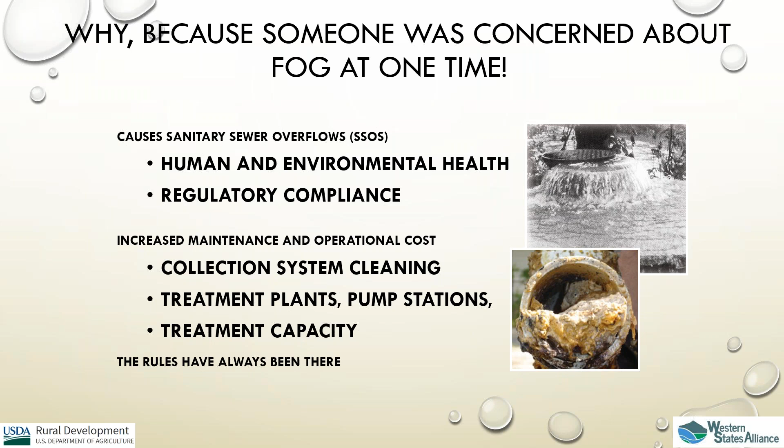There's another reason: you may have an increase in maintenance and operational costs in the collection system, or grease buildup at the treatment plant, or even at the pump stations, as we talked about last week. The other one that sometimes creeps in is capacity. Is capacity an issue at your facility? And if capacity is an issue, what can you do to reduce the inflow of the extra solids and extra BOD and TSS that comes to the plant? Sometimes addressing FOG helps reduce capacity issues.

But the important thing to think about is, obviously now that you know you have a program, or you're thinking about improving one, or if you haven't had a program and after watching our first two webinars you decided to go ahead and start one. But the most probable reason that you do have a FOG program is management. Management says that there's a need out there, and they also told you that was the case. And the fact that you're now improving the FOG program is definitely in your future.

You need to know more about the desired outcomes. What are the desired outcomes that you want in improving or expanding your current FOG program? Something we've said before, and I'll read it again: we want a data-driven FOG program, not an effort-driven program. That really hits home, and it's important to know it's a data-driven program, not an effort-driven program. By the way, that was Gary Christensen of the City of Seattle public works.

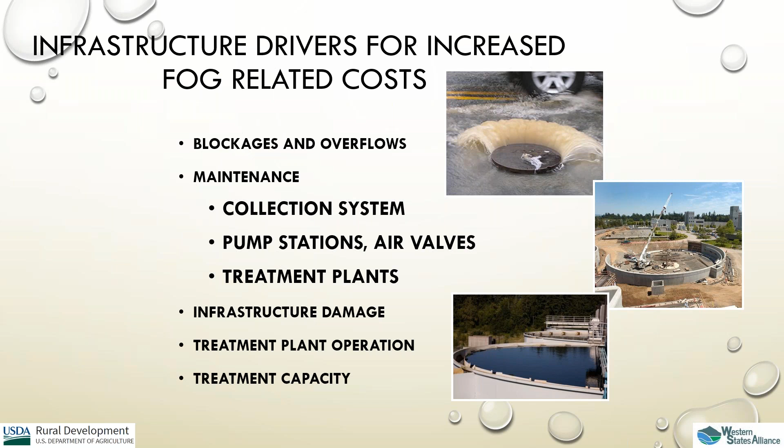Once again, here we are again. We have regulators as a driver. They definitely are a driver for a FOG program.

Like I said earlier in this presentation, if regulation is the driver for your FOG program, there's a lot of aspects of your program that's going to come under scrutiny. And if your POTW permit is up for renewal, I guarantee you new conditions are going to be applied. Not only additional reporting, but record keeping for the SSOs.

Also, you may actually require additional public notifications when you have an SSO. And once again, I think this is something that a lot of people don't end up doing or taking advantage of.

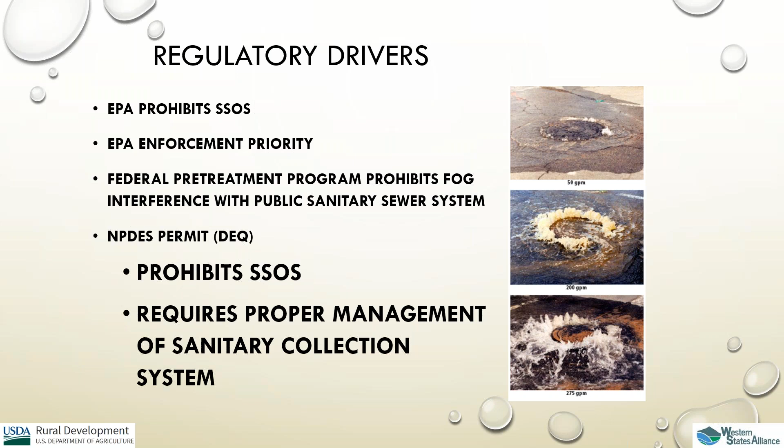This is document the management and operational and or maintenance programs and make sure that they're up to par. It's not just the collection system, but it's also the management's operation and the maintenance programs. Make sure they're up to par. And if they're not, highlight what needs to be improved and work on those improvements.

Well, what are the outcomes and outputs for that regulatory driver? If the activities I've talked about in the previous slides have already come about, or that's already happened to you, I guarantee you that regulatory agency is probably addressing those issues right now.

But here's the other: if you're afraid or concerned about the regulatory agency, once again, the answer is very simple, but it's also kind of more complicated too. The simple part is just comply with state and federal regulations. Don't have those SSOs related to FOG.

No illicit discharges to the storm system. Excuse me, illicit discharge of FOG to the storm system.

And once again, this is probably the more difficult one, but to reduce or have no restrictions in the collection system that have to do with solid or those viscous substances. And once again, no infrastructure deterioration or damage due to the FOG. And once again, if you're having it, make sure you document it.

Now here's that, that was the easy part, is no, no, no, no, no. But the hard part now is your FOG program. And if you need to expand it or fine tune it, it's time to start now. Or if you don't have one, it's time to implement that FOG program.

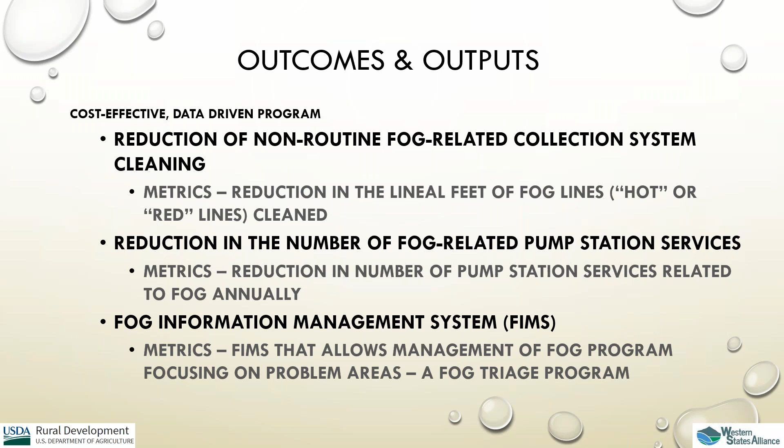That particular last slide was a good segue into this one. What are the programmatic drivers? What always seems to be discussed every time you have a staff meeting, but particularly around budget time, is program cost, budget, or is it in the budget? Those issues always come up.

And what they're concerned about is the program cost for inspections. Is it in the budget for a data management system? And is it also, what is the budget program cost for program oversight? That's inspections, data management, and oversight. What are the program costs for these items?

But these are three very basic items, but they can be very expensive and budget busters. Once again, back to that data-driven program, not an effort-driven program. This is where it really can cause a budget buster.

But your FOG program can be a very cost-effective program, and the key to making it cost-effective is having good planning, triage, proper data management, and management buy-off at the highest levels. Let me repeat: good planning, triage, proper data management, and management buy-off at the highest level. All those are very crucial in having a cost-effective program.

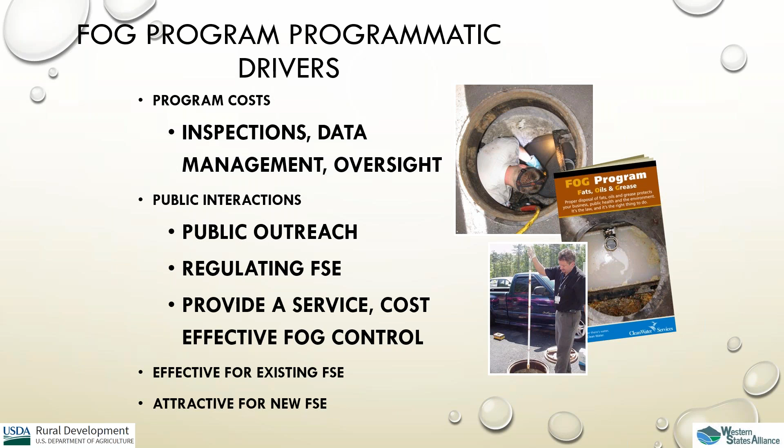Once again, when people ask you questions and get answers, they may or may not like them, but they feel like they're being paid attention to and listened to.

I'm just going to go through the slide here to summarize everything we've talked about. The important thing is to comply with state and federal regulations, and that's the easy part. But if you have no fog-related SSOs, no illicit discharges to the storm system, no restrictions in your collection system from viscous substances, and no infrastructure deterioration, you're in a darn good place. You have a pretty successful program, and if you have all these items, you've got one good program.

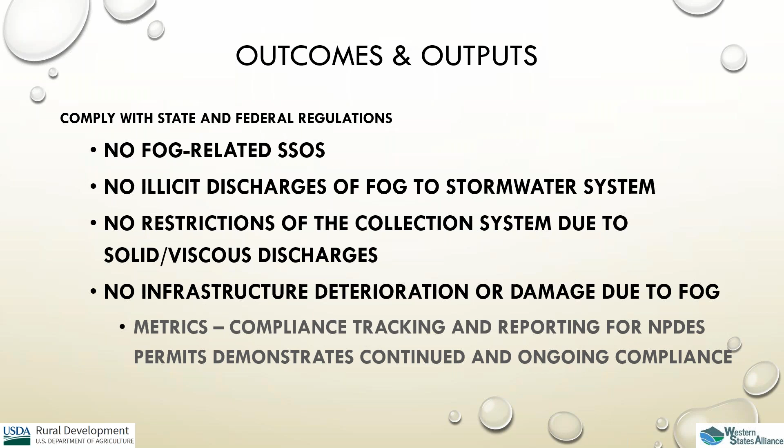Does your city or utility have a formal fog program?

Okay, I'm going to close it soon. Few more seconds. Okay. Oh, wow, that's a big number. Yeah, we're glad you're on this presentation. I think that's probably one of the higher numbers we've seen.

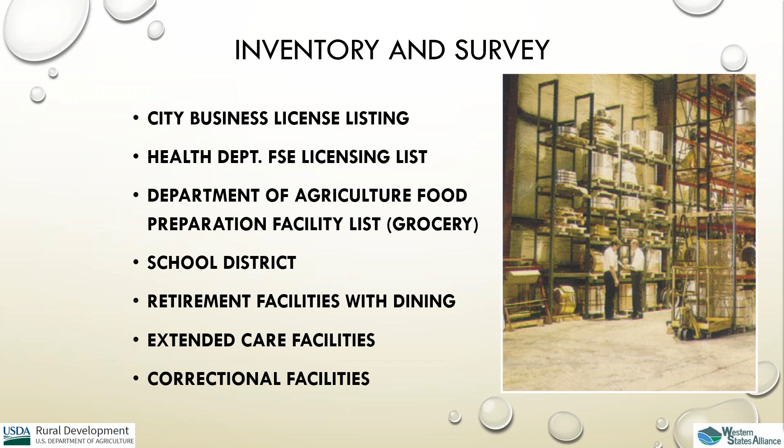Let's talk about stakeholders. We talked about this in the presentation last week, how important it is when you're doing your FOG program development and planning. It's important too when you do your implementation—you need to make sure you've kept your food service establishments up to date on what you're doing and how you're going to implement your program.

If you already have a FOG program in place, you need to make sure your food service establishments are aware of the criteria you've established and what their responsibilities are. Small businesses need to know what the regulatory structure is and what the requirements are.

In a lot of communities, a small business can come into the community and set up a restaurant, and if the city hasn't given them the criteria they need to meet to stay in compliance, they'll do their best, but they don't know what they need to do. Over and over, we've heard folks say, if you just tell me what to do, I'll do it, but I need to know, and I want it to be the same for me as it is for Joe down the street. So keep that in mind.

Your building and plumbing officials, your plan reviewers, they need to know what the expectations are when they do a plan review on a new food service establishment. They need to have information they can give back to the owner of the restaurant. Ed's going to talk about this in more detail, but a lot of building codes set a minimum bar, a really low bar.

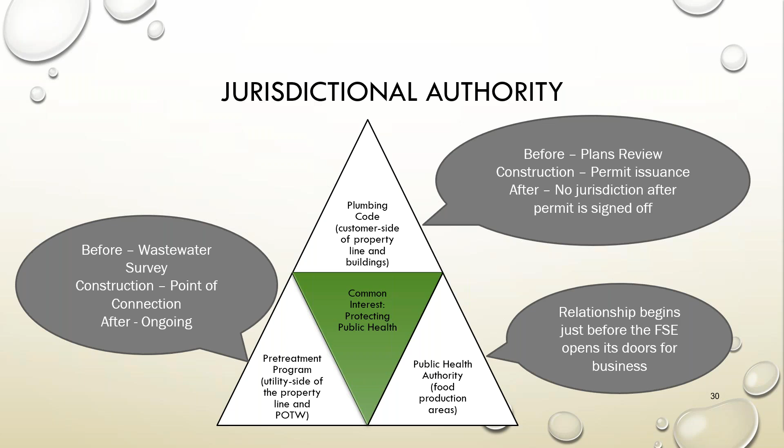Again, a list of your potential stakeholders and partners. These are the folks you're going to partner with when working your FOG program: city officials, food service establishments, the pumpers - we talked about them and will talk more on Wednesday - other regulators, which we went through today, property owners and property management, consultants and contractors, school districts, hospitals, and long-term care facilities.

We had an issue in Washington County where we had a major trunk line that went through a wetland area, and on the hill above - it seems like they always build hospitals up on hills, I don't know how that is - this is another hilly hospital story, not one that I told Ed or that Ed tells.

The hospital did a remodel on their kitchen. We were not aware of it. The city building official was not aware of issues with protecting the fixtures and drains, because it was right before the plumbing code changed. So the hospital put in a brand new kitchen. They'd just expanded their facility, adding a couple hundred beds to one of the hospital wings.

So the number of meals they were going to produce was larger. They expanded their cafeteria and added a cafe and a coffee shop. About four months later, we had a sanitary sewer overflow in the wetland area downstream from the hospital.

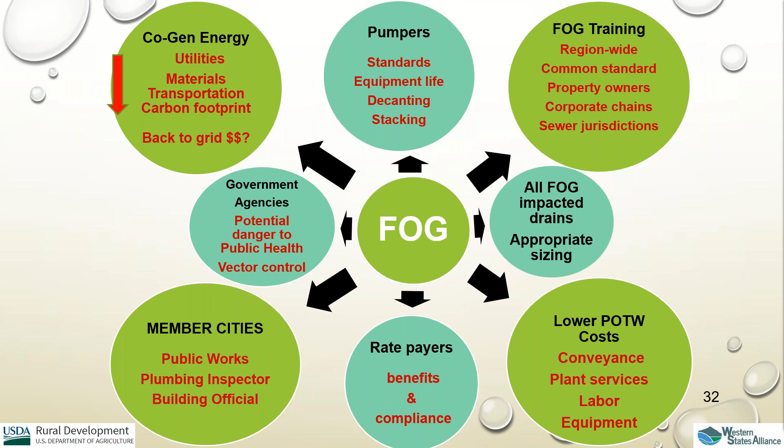I also talked about making sure that your restaurants, your commercial facilities, know what they need to do and the consequences of not doing it. You need to make sure that they know what your fog requirements are, that they need to have some kind of an interceptor, that they need to maintain that interceptor with regularly scheduled pump outs. They need to keep records of the pump outs and potentially submit those to you, and that there's potential for enforcement action if they fail to comply with your code, or if they cause a sanitary sewer overflow or a backup or excess line maintenance.

They need to know that, because most of them, if they know what they need to do, they're going to try and do it. You may need to provide technical assistance, but keep those folks in mind and make sure that you provide that information to them either through a letter, or when they come into your jurisdiction, you give them a packet of information that has this stuff in it, or flyers, technical assistance - give them some information on doing fog loading calculations so that they can appropriately size their interceptor based on what kind of maintenance schedule they want it to be on.

Ken's going to talk about that more later. We have some of those fog calculators linked on our website. Almost all of these fog calculators use the Kennedy-Jenks study for grease loading, so they're pretty accurate. Although Ed's going to show you some pictures of some designs that were installed and didn't quite get up to the expectations on Wednesday.

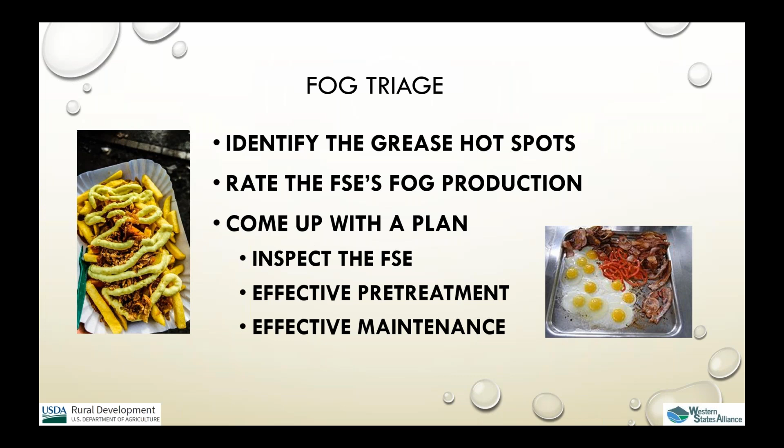And the last of the three steps here for fog triage is to come up with a plan to inspect the food service establishment, talk about effective pretreatment and effective maintenance. You can be working on that plan while you're doing steps one and two, but you'll need to be prepared to discuss what kind of pretreatment might be most effective for that facility and what effective maintenance for that pretreatment would look like. We talked about tracking and particularly GIS mapping to do that - this is another look at what Ed talked to us about earlier.

This is a Clean Water Services map of their service area. The red dots are quarterly cleaning, the yellow are semi-annual, the green are annual - all of them a far cry from the standard 3 to 5 year cleaning cycle that is common for most sewer pipes. When they mapped out all of the FSEs in their food service area and overlaid that map on the grease hot spots, you can see there's a very direct correlation between clusters of areas requiring extra cleaning and clusters of food service establishments.

So that was one way to both collect and keep the information and track things. It was also a good way to present the information to various stakeholders in a very clear and concise fashion as to why the fog program needs to be implemented and what the anticipated results could be.

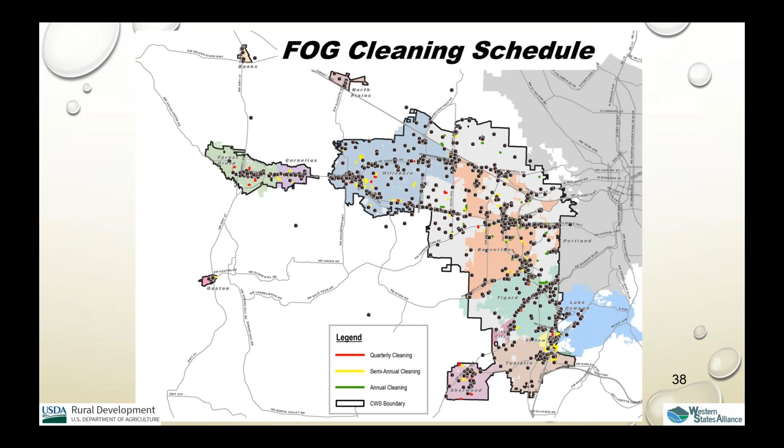In this particular one, you could put in any address, and that map would take you right to that location. It took a lot of time to put that all together, but now they have a very efficient system for tracking whenever they go and make a service call.

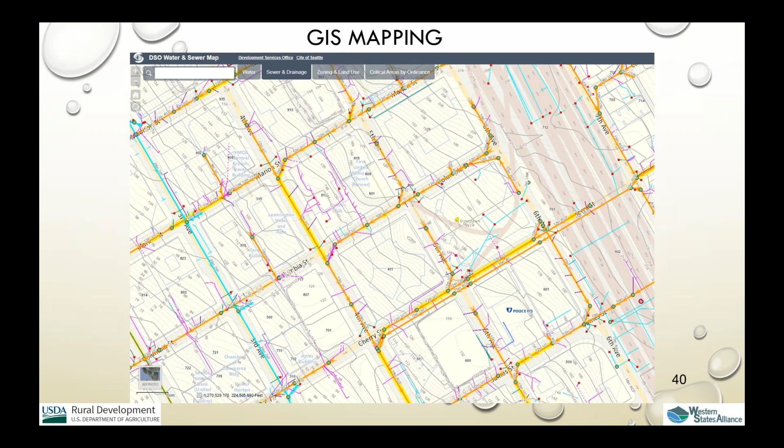So we talked about fog production, about rating facilities as very high, high, medium, and low. And we also talked about the Kennedy-Jenks brown grease study, which is most commonly used as the basis for that categorization.

A lot of restaurants, when they went in and took a look at them with this study, went in with an idea of exactly what they expected that facility to be - whether they thought it would be high, very high, et cetera. They actually have those all listed out as an appendix in the study, Appendix C. If you look here, the full page is page 1 of the facility.

The table is 20 pages long altogether, and there are hundreds and hundreds of restaurants that were part of this study. This includes the initial listing category and a post-study category, which you can see in the magnified snippet, covering that page and most of the right-hand side.

As you look at it, you can see that a lot of the American restaurants, for example, were anticipated as high fog producers, but when they actually got out and started measuring them, the vast majority were not. There were 45 that were tested, but test results showed that 35 of them came into the medium category - that's about 80% of the restaurants. So the overall designation for that category would come out as medium.

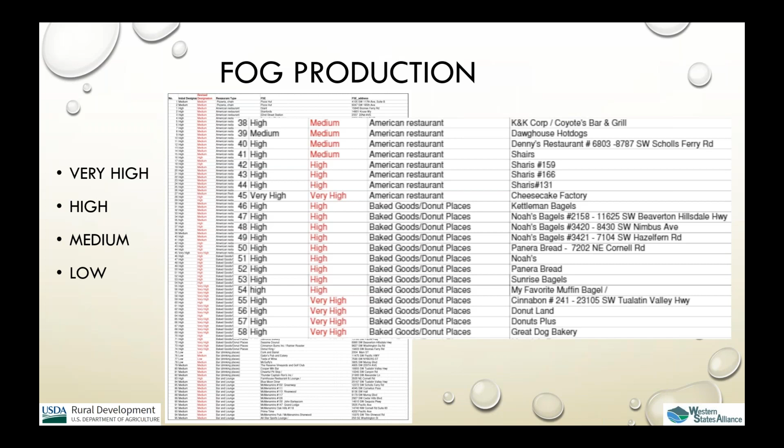So once you've done those things, now you're ready to do the inspection on the food service establishment and do your walkthrough in the facility.

Early on, you'll want to identify where the grease removal device is. If by chance they don't have a grease removal device, then the plan is going to be a little bit different, and we're not going to cover that at the moment in the interest of time.

But once you've determined the location, you can visibly inspect the interceptor, determine what kind of condition it's in, find out which fixtures are or are not connected, and how often it is serviced.

That's part of the information you'll need when you look at the rating capacity of the interceptor and the grease production of the facility, using that to establish an effective pump out schedule.

And again, as with the example we gave earlier, you'll want to do that with the restaurant manager if possible.

You'll want to do that using the calculators we'll look at Wednesday, and that will establish your pump out schedule. You'll be able to do that either based on how often they want to pump it out, which will determine what size interceptor you want, or how often it has to be pumped out based on the grease production they have.

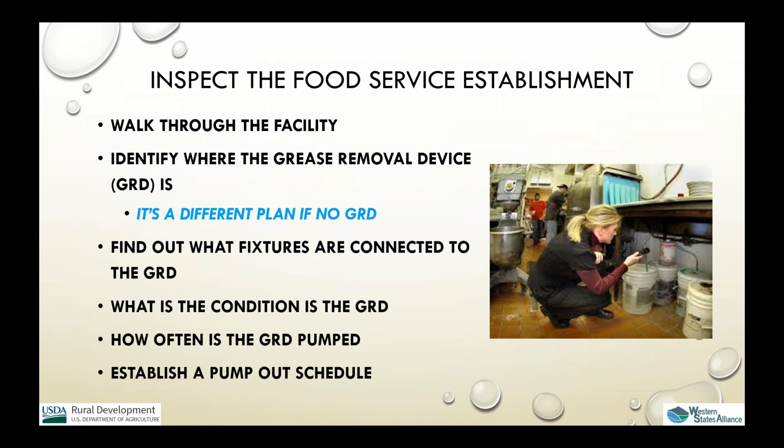So we're going to talk a little bit next about best management practices in the kitchen. But before we do, we have another one of Krista's polls. All righty.

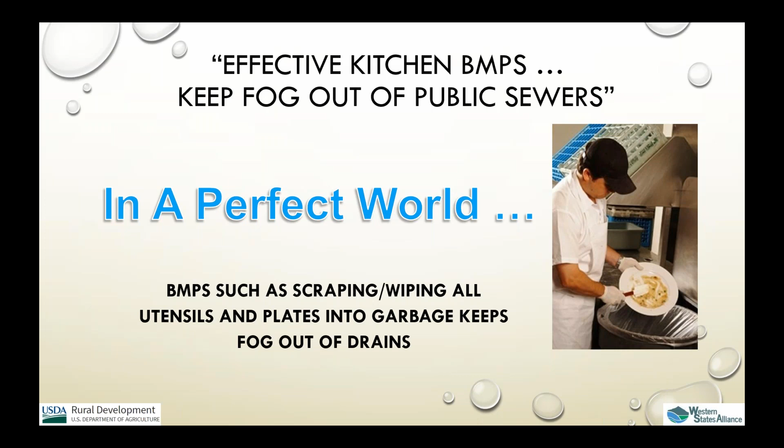Unfortunately, there is quite a difference between the perfect world and the real world. In the real world, cleanup staff are always in a big hurry. I've never seen a kitchen where the dishwasher wasn't working at a fairly consistent, if not furious, pace.

They're doing everything they can to get cookware and tableware cleaned up and returned to service as fast as possible, and they're doing it over and over again throughout the service day as people come and go. So at the end of the day, cleanup is usually performed by fairly tired staff, given a minimal amount of time to do the job.

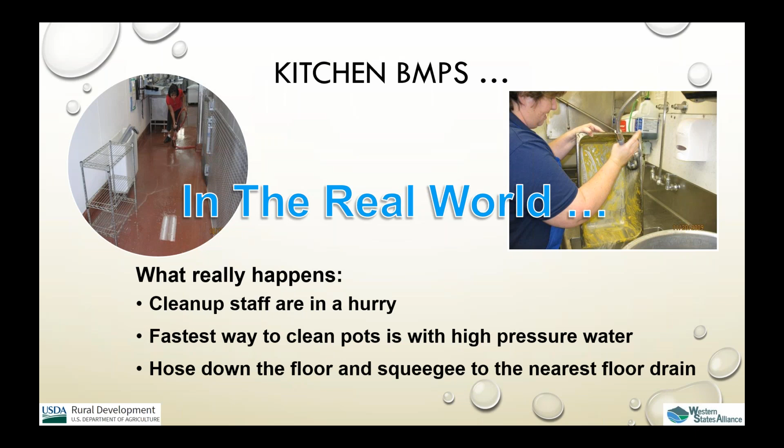The food service manager's responsibility is chiefly about getting good food onto the customer's table. That's the whole purpose of the restaurant being there. So overseeing daily operations, hiring and training staff, coordinating schedules, planning menus, ordering supplies, dealing with unhappy customers and resolving their complaints are all things in their daily life that come before kitchen best management practices for the FSE manager.

They also have budget constraints to operate within, reports to submit, revenue goals to meet, regulatory compliance to worry about, particularly with the health department if there are inspections coming up. So for these and other reasons, staff best management practice training is frequently delegated to a more tenured employee in the same area, i.e. the dishwasher that's been there the longest is training the new people on what best management practices are.

And that may or may not be effective, and there may or may not be follow-up on the training by either the restaurant manager or that more tenured employee.

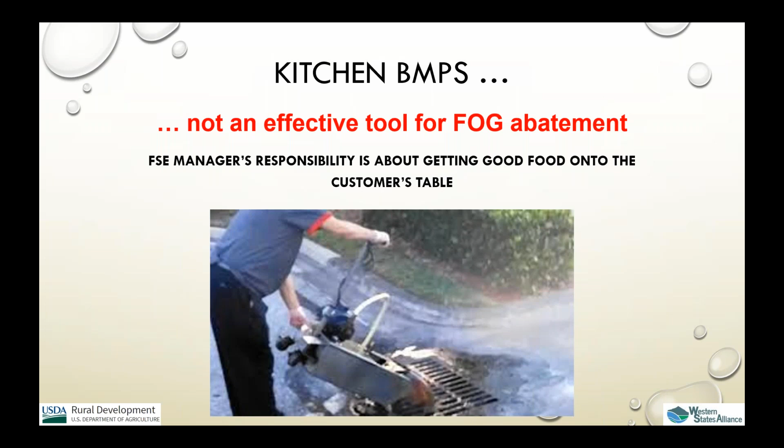In a lot of cases, it's more like 100%. Some FSEs have reported 200% or higher turnover rate, which means they have to train a new employee at least 2 or 3 times a year in kitchen best management practices understanding.

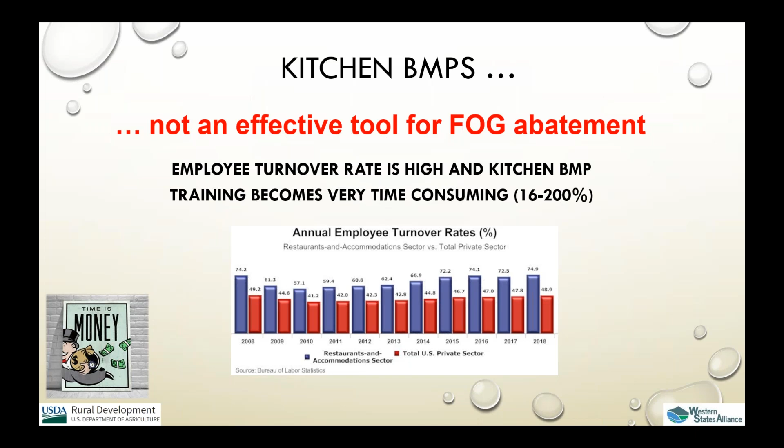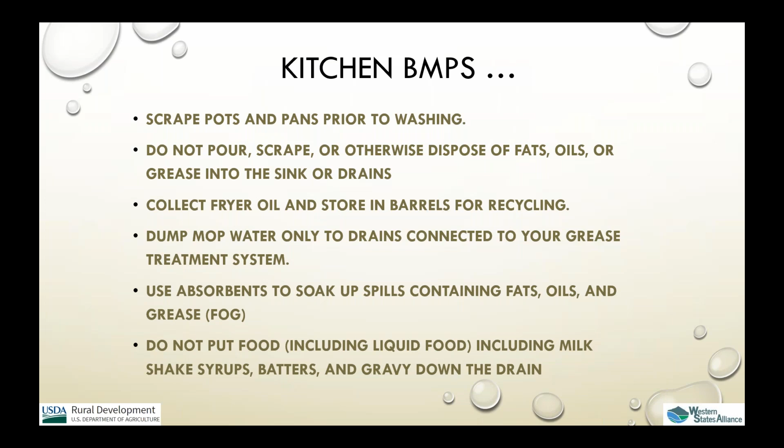Also with kitchen best management practices, there's a wide variety out there, and you're not going to be able to train everybody on everything. You're not going to be able to list them all out, or it'll eventually just become wallpaper and nobody will notice it anymore. This slide and the next three that follow are a collection of best management practices we're either aware of or found from a cursory internet search covering various FOG programs, restaurant associations, independent contractors, etc. A lot of them are pretty universal, like scraping pots and pans before washing, not dumping oil directly down the sink, that sort of thing. Then some, like post-no-grease signs, are fairly common.

Then there are some that are a little less universal, like ensuring that wastewater from duct cleaning gets routed through the interceptor. That's something that doesn't happen on a regular basis and as often as not gets totally overlooked. But it's important, because whenever you clean those ranges, you're moving out a lot of really heavily FOG-laden wash water.

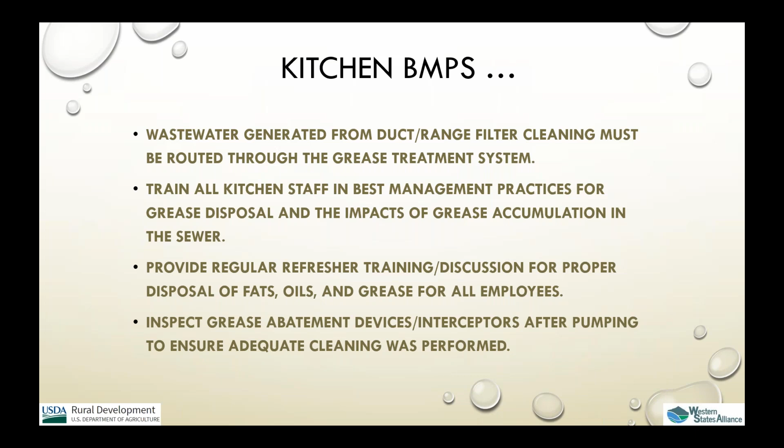There are also variations like screening all wastewater flows to prevent solids from entering the interceptor, and maintaining a written log of on-site grease interceptor cleaning and maintenance, which frequently is a regulatory compliance requirement but also frequently does not happen.

Keep in mind with all this that you're not going to be able to train new kitchen staff over and over again on all of these things. So you have to select what would be the most effective, or certainly the most effective in your estimation for your program, and then keep the list at that. The larger the list, the more likely at some time all of it or some of it will be enforced less stringently by the food service establishment.

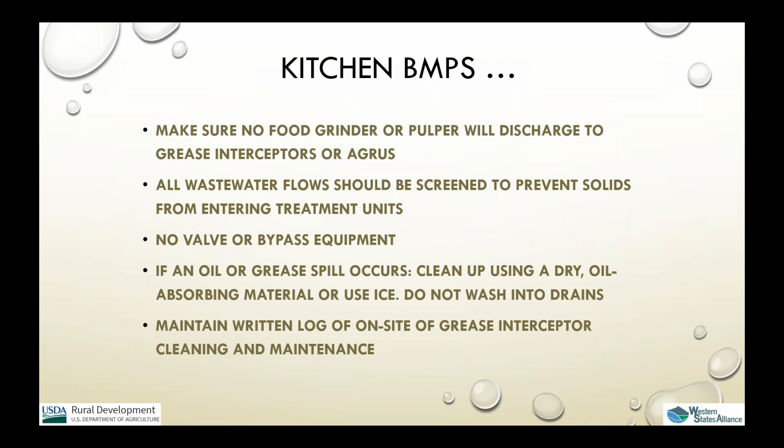You also occasionally run into the fact that sometimes the FSE does not own the interceptor or pay for the maintenance. For example, sometimes you see that in strip malls or food courts, where the costs are buried into the lease agreement, and they don't consider that their problem.

And it's particularly not their problem because it's buried into the lease agreement. They're already paying for it, so they're not getting a benefit out of addressing that. And so you have that issue to also run across.

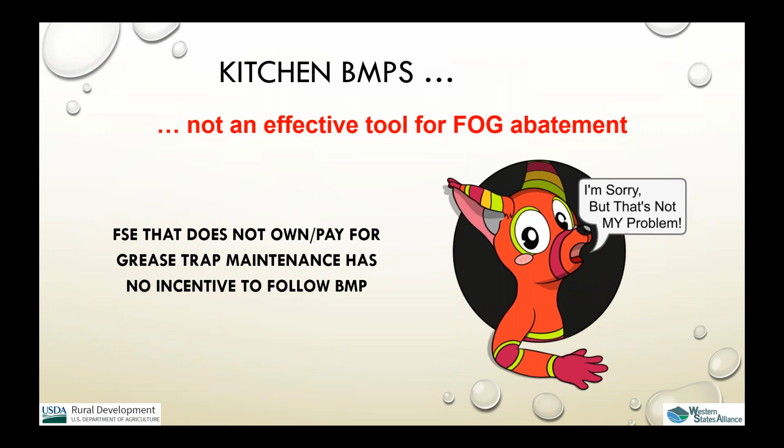So this is a look at a particular line, a high fog producing line. All of the restaurants on this line had to have kitchen best management practices implemented, and they're regularly inspected, and they have regularly scheduled interceptor maintenance.

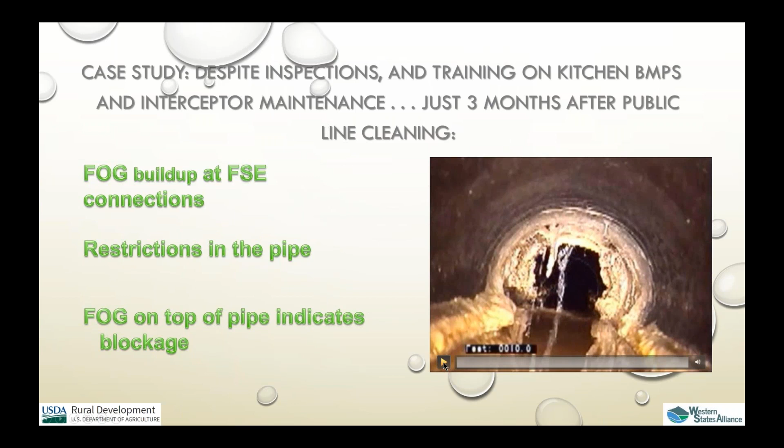So you can see on this all of the fog buildup from the discharge. This particular one is dumping in from overhead, and you're getting buildup on the wall from splatter, and you're also seeing buildup on the sides of it.

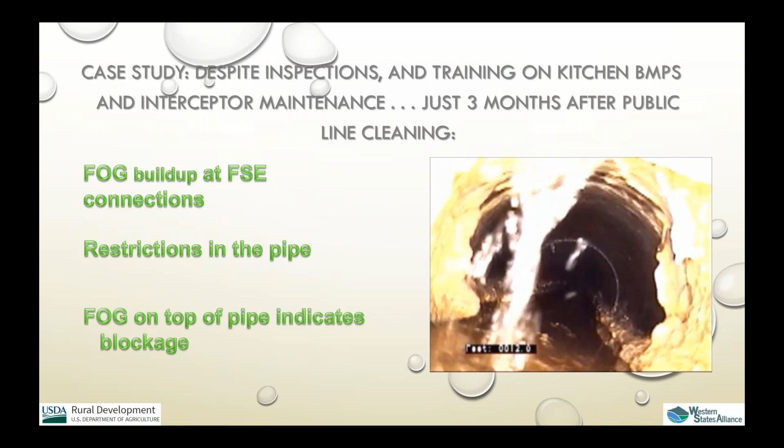And you're looking now down at a section of that sewer pipe that was replaced prior to this, the three months, that was replaced right after the public line cleaning when they found problems. So again, this is a high fog producing line, three months after best management practices were implemented. You can see their effectiveness - it may be much worse without them, but as a major tool in your toolbox, they're lacking some performance.

So what does that mean? Does that mean we need to get out of kitchen training because there's nothing good about best management practices? I hope that's not the takeaway from this, because that's not quite what we're trying to let everybody know.

One of the things about kitchen best management practices is, as we say, they are one of the tools in the toolbox, and as such, they are actually your first line of defense against fog. Your last line of defense is the interceptor. BMPs are your first line of defense, and they can make a difference. They can't make the major difference, but they can make a difference. They can help control costs a bit.

They have the most resources available to download and print, particularly resources for ESL employees. You'll see this in a variety of sources. Most major municipal areas have fog resources for FSEs. The National Restaurant Association has got a collection of best management practices, brochures and posters that you can download, print out, and post yourself. And they have a lot of them, again, in other languages.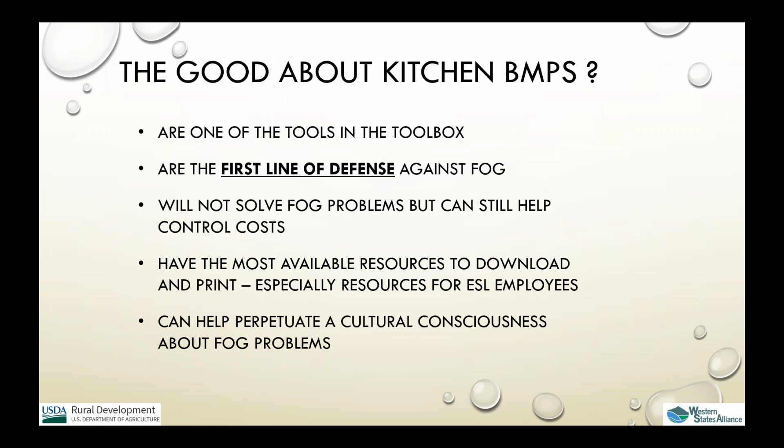So as a major part of your program, what takes the place then of best management practices? So we come back to - and I hope this hasn't become beating a dead horse for you - connecting all fixtures and drains in the food service area to an interceptor. It is just such a significant improvement.

Ed's going to expound on that a little further, and also come up again with the chart that showed the four representative samples of the testing that was done after the retrofits, which pretty clearly show that there's a significant benefit to tying in all fixtures and drains. And I think it would be hard to argue that best management practice could achieve that same thing.

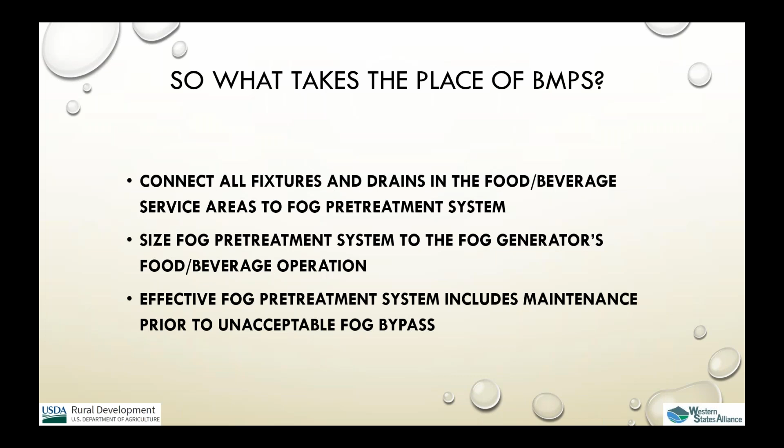So I believe it is my time to pass this over to Ed. So Ed. Here I am, and give it to me, Ken. All right, it is coming and it is yours. All right, thank you.

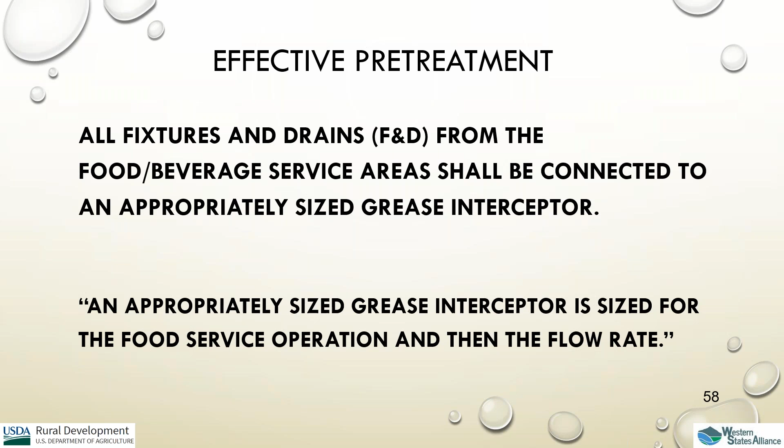Retrofits are kind of a separate discussion. Looking at the time, see how fast we are—I'm just going to go into detail on some of these slides that summarize this.

Here's a restaurant that has the HGI there, you can see it in the top left-hand corner. This is where it's just connected to the 3-compartment sink. What would happen if you moved this 3-compartment sink?

Let me tell you. If you ask plumbing inspectors, it would not be unusual for most of them to say the only thing that's important is to connect the 3-compartment sink. But we've talked about this before—the idea that the only grease that comes out of a facility is from a 3-compartment sink is wrong. We know there's a lot more grease that comes out of the facility besides the 3-compartment sink.

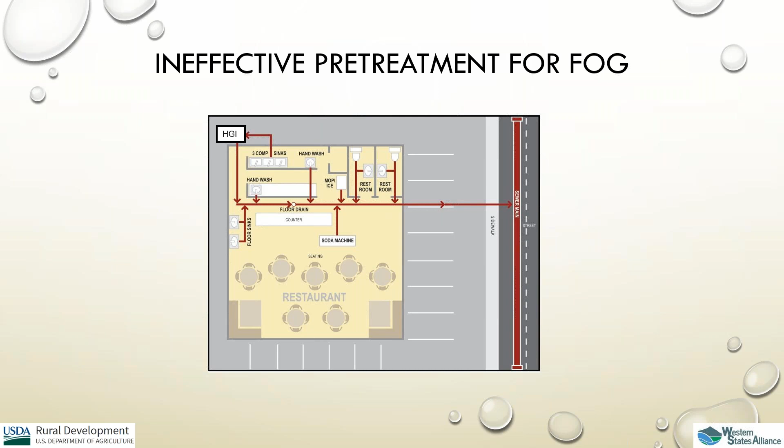But here's the next slide. I'm going to take the HGI that's up there in the top left corner and let's move it to the outside to a GGI. What's interesting is we didn't really change much plumbing on the inside. However, what we did is reroute the plumbing from the restrooms to the downstream side of the grease interceptor. Voila—all of a sudden everything in the restaurant is connected to a properly sized grease interceptor. This doesn't even have to be a gravity grease interceptor—it could be a hydromechanical one, properly designed to catch the flow from this facility.

Once again, you need to evaluate the flow with the size of the interceptor. The point I'm trying to make is that you don't have to do much to the inside of a restaurant. All you have to do is think about the positioning of the HGI or GGI—the gravity grease interceptor or hydromechanical device. Understand where it is, and you can see it isn't much more complicated than moving it to the outside. I think it captures a whole lot more grease coming out of your facility.

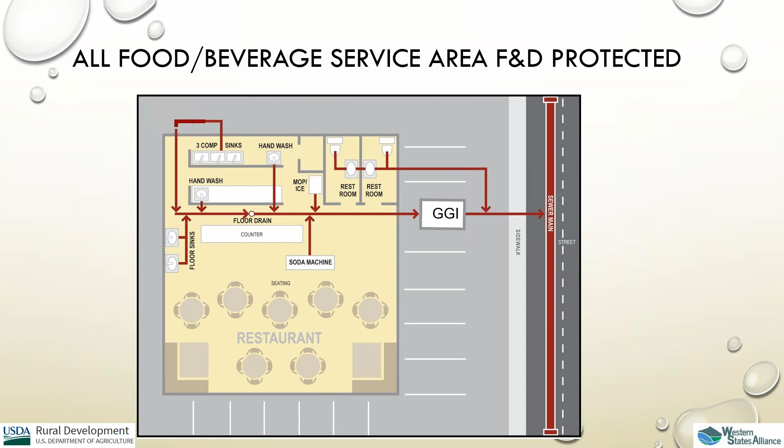This is just another—Krista, I'm surprised, do we have a polling slide here? Want to just do one of the polls? Sure, let's do it fast though. Let's just do one poll, guys. How many FSEs have most or all fixtures and drains discharging to an interceptor?

Okay. Try to take it, I'm going to close it. All right, all right. There we go, that's pretty nice.

Good to see both sessions today having more than 20%. So that's good. Glad to hear that. I'm going to go ahead and let's just do one slide and move it on, okay?

Here we go. Just a comment from someone saying they've never done a fog inspection and don't even know if they're getting done. Well, that's some scary information. Hope what we showed you on the value of doing fog inspections is an eye opener for them. Next Wednesday, when we do the last session of our webinar, you'll see a lot of the things you'll encounter during a fog inspection. I hope you enjoy next Wednesday's presentation.